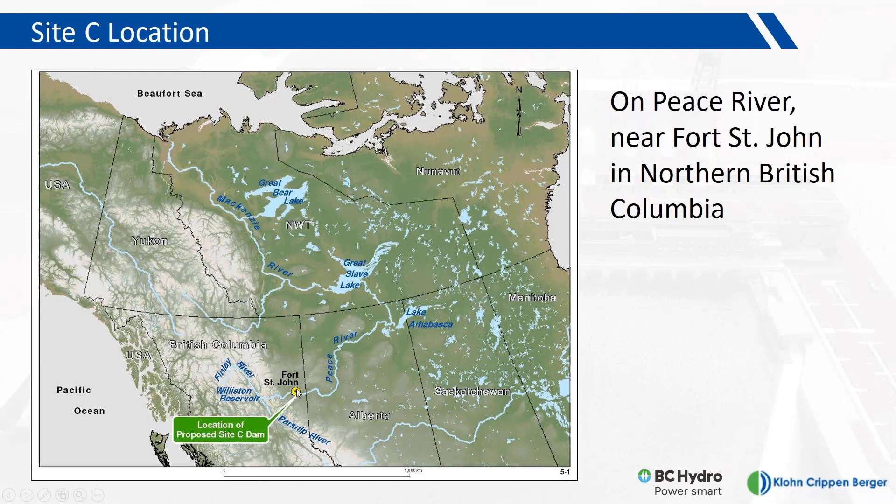Site C, when completed, will be the third dam on the Peace River, downstream from the two existing facilities, which are the WAC Bennett and the Peace Canyon Dam. Site C will be approximately 83 kilometers downstream of the Peace Canyon Dam on the Peace River.

Because of this, Site C is able to take advantage of the storage in the Williston Reservoir to generate a fairly large amount of electricity with a relatively small reservoir footprint. You can see from this map here, the large Williston Reservoir, which is impounded by the WAC Bennett Dam, the smaller Dinosaur Reservoir, impounded by the Peace Canyon Dam, and the proposed Site C Reservoir with the dam near the town of Fort St. John.

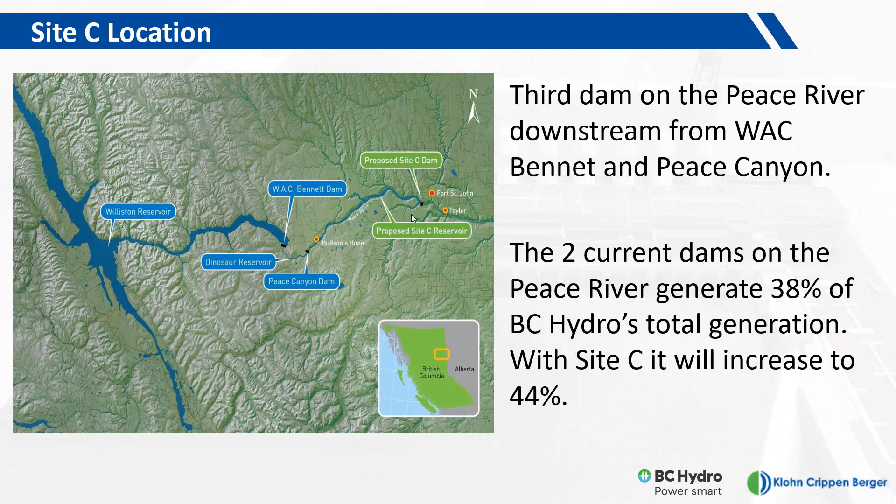The Site C project was first contemplated in the 1980s, and the dam axis identified at that time is actually very close to the present location. Here's a piece of trivia: where does the name Site C come from? During early investigations into the project, a number of different dam axes were identified as possibilities, ranging from Site A, the most upstream dam closest to Peace Canyon, all the way to Site F, the most downstream location. Site C, one of the ones in the middle, was identified as the preferred location for a number of reasons, and that's how we still use the name Site C today.

Here are a few key facts about the Site C facility, shown in this architectural rendering. Site C will be an earth-fill dam with a crest length just over 1 kilometer and a height of about 60 meters from the riverbed to the dam crest. The generating station capacity will be about 1,100 megawatts, with energy production of about 5,100 gigawatt hours per year. The reservoir length upstream is about 83 kilometers, to the toe of the Peace Canyon Dam, and the river width will be about 2 to 3 times the current river on average.

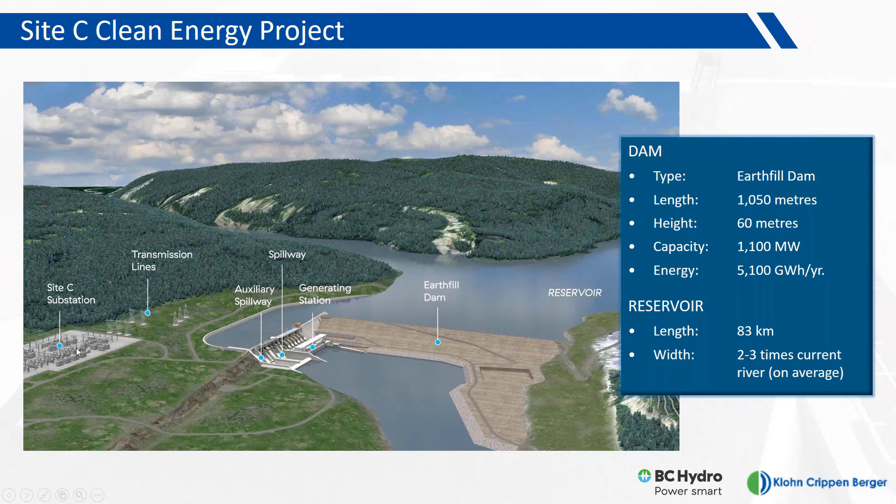Here's another rendering showing key components of the dam site. Today's presentation will focus on the north bank of the river, on the right side of your screen, where the Site C diversion tunnels are located. You can see the diversion tunnel inlet and outlet labeled here. The tunnels are in the left bank, on the right side of your screen, and form a U shape around the earth-fill dam. You can also see the reservoir and a representation of a debris boom upstream of the dam.

You can see the approach channel on the left side of the screen, which conveys water from the reservoir to the power intakes and the spillway. Also shown is the outline of the RCC foundation - RCC standing for roller compacted concrete - which will be built underneath key dam structures, including the spillway, power intakes, and powerhouse.

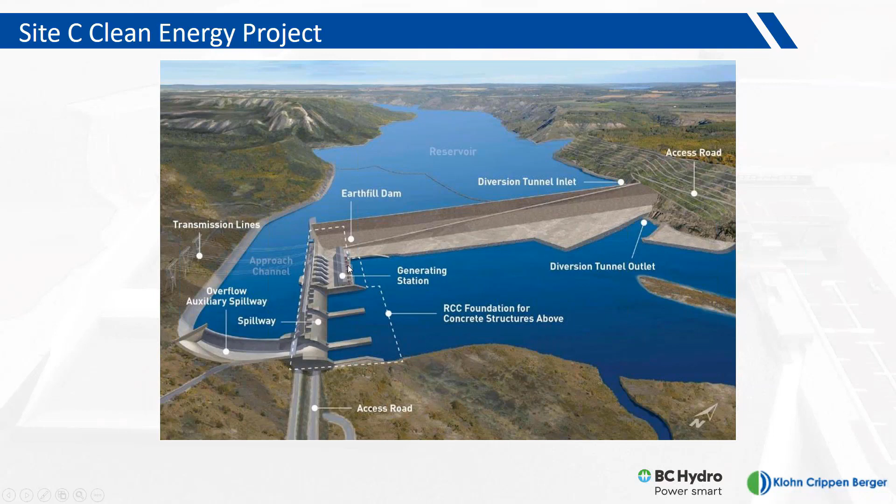Here's a schematic view of the diversion tunnels on the north bank at the Site C dam site. You can see the inlet structures at the top of the screen. The tunnels go into the bank around the earth-fill dam and out the bottom of the screen at the outlet structures. Each of the two tunnels will be approximately 10.8 meters internal diameter and concrete lined. The length of each tunnel is about 800 meters, and these tunnels are designed to pass the entire Peace River flow for approximately 3 years during construction of the earth-fill dam. They're also designed to pass a fairly significant flood event during construction, which I'll talk more about on the next slide.

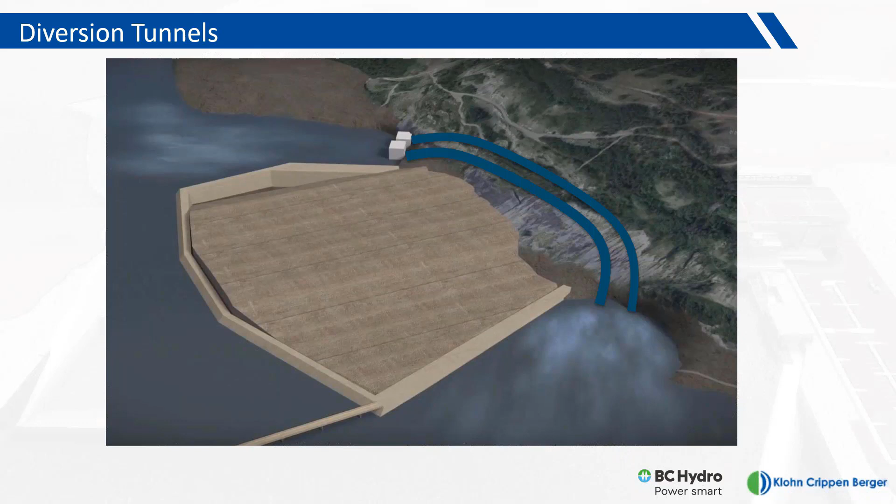The Site C diversion tunnels are designed for a total flow of up to 3,000 cubic meters per second. The Site C environmental impact statement establishes a minimum downstream flow during construction and permanent operations of 390 cubic meters per second. During reservoir filling, water levels are quite low and haven't yet reached the level to pass into the approach channel and feed the power intakes or spillway. So at the start of reservoir filling, we needed a way to pass the minimum 390 cubic meters per second downstream while allowing the reservoir to fill at the same time.

This was really the core design challenge, because the diversion tunnels are designed to pass a large amount of flow during construction, but in order to fill the reservoir while maintaining downstream flows, we needed to restrict the flow capacity through the tunnels. The obvious solution was to shut one of the two tunnels and perform reservoir filling with only one operating. But unfortunately, due to the large size of that tunnel - 10.8 meters internal diameter - the capacity is still too great to allow reservoir filling with normal flows from upstream.

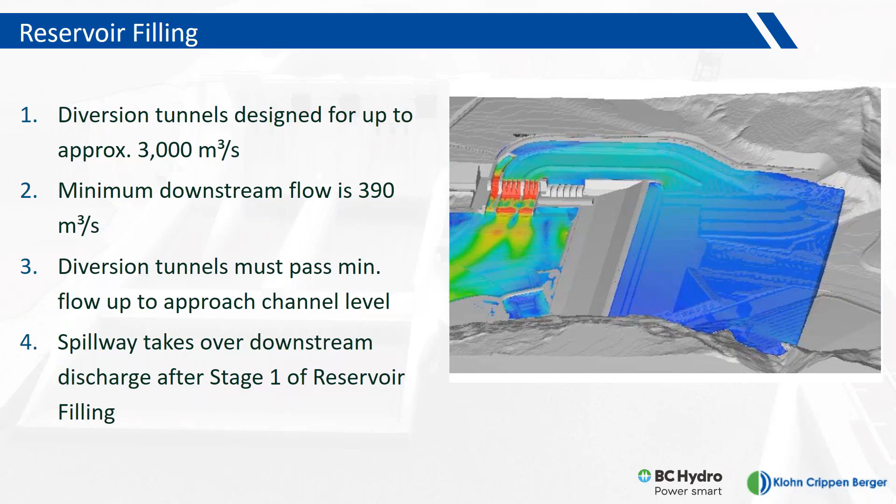So we had to investigate some alternative arrangements to pass those flows while filling the reservoir. This first stage of reservoir filling is done with the diversion tunnels passing flow downstream. But once we get up to the approach channel level, which is about half of the reservoir filling, then we are able to pass downstream flow through the spillway, so the diversion tunnels are closed and no longer used for passing flow downstream.

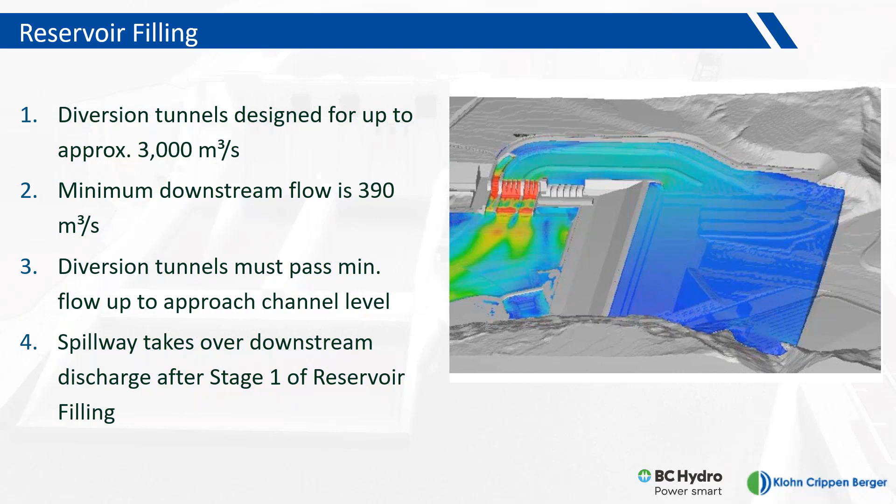But it was really this first stage of reservoir filling that is the topic of the presentation today. So before we started looking at different arrangements, we wanted to establish some key criteria for evaluating our design alternatives. We came up with a list of key criteria to use to evaluate our alternatives against. The first criteria is a translating hydraulic jump.

What I mean by this is we did not want to accept a final arrangement that would involve a hydraulic jump moving up or down the tunnel in different locations depending on the reservoir level. That would expose the tunnel to risk due to pressure fluctuations and the moving hydraulic jump, and it would also expose the outlet structure to potential risks from those pressure fluctuations. So we didn't want an arrangement with a moving hydraulic jump.

The second criteria was vibration of the upstream control gate. Each tunnel has an inlet gate designed to open and close. That inlet gate must open and close without issue at final closure and during initial diversion. So we didn't want to accept an arrangement where vibration of the control gate could potentially damage it or cause increased risk. That was our second criteria.

The third criteria was the impact on diversion. As I said before, the tunnels will operate for 3 years to pass the Peace River flows during diversion. We did not want to impose any additional losses or impacts on that diversion period or in the diversion tunnels, so that we increased risk of overtopping of the cofferdams during construction. We wanted an arrangement that would not impact the diversion tunnels during that 3-year construction period.

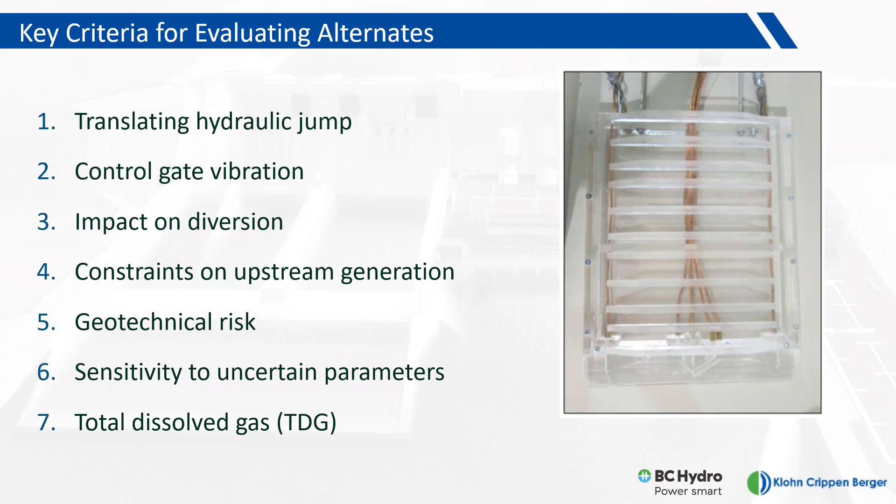This was one of the options raised during historic design of Site C in the 1980s. They were looking at partial closure of the upstream regulating gates, which effectively reduces the flow through the tunnel. But the reason we didn't like this arrangement was because it generated the translating hydraulic jump, or a moving hydraulic jump, which, as you recall from the previous slide, was something we did not like due to the risk to the tunnel and the tunnel liner. The second alternative we looked at was modifying the diversion tunnel diameters.

Both tunnels have an equal diameter of 10.8 meters. We did consider building one larger tunnel and one smaller tunnel, which would allow us to only use the smaller tunnel during reservoir filling. However, due to constraints in the rock for the larger tunnel diameter, we did not want to go much larger than the 10.8 meters already established. That did not allow us to consider largely different tunnel diameters for the two tunnels, so we didn't like that option either.

The third option we looked at was building an entirely third diversion tunnel just for reservoir filling. That would be a much smaller tunnel than the 10.8 meters, and it would achieve the required criteria. But as you can imagine, that would be a very expensive solution and not something we wanted to accept until we exhausted our other alternatives.

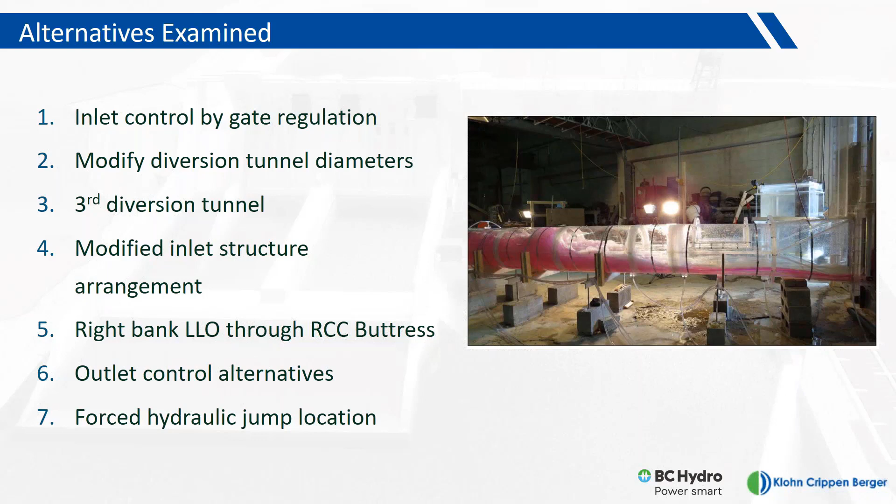The seventh option, which I'm going to show a little bit more in the next slide, was a forced hydraulic jump. We didn't like the first option, inlet control by gate regulation, because of the hydraulic jump moving up and down the tunnel. But we thought maybe we would be willing to accept this arrangement if we could keep the hydraulic jump in a known location near the upstream end of the tunnel. On the next slide, we did some further analysis on this option.

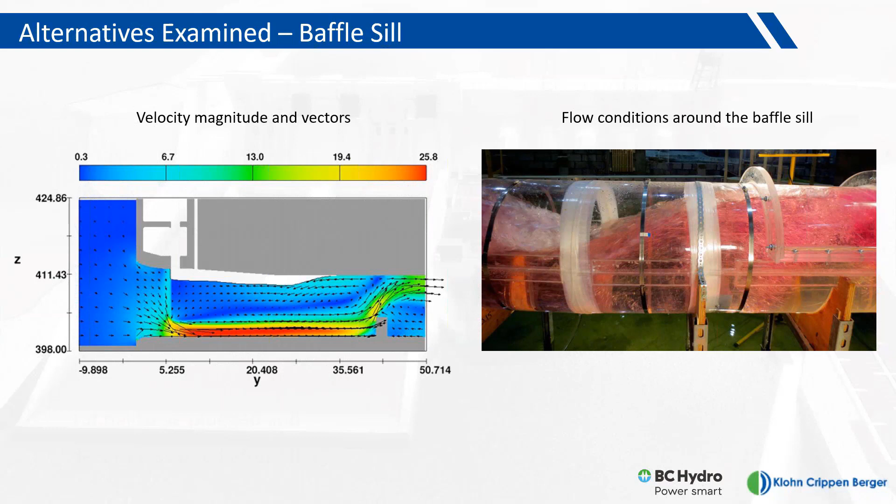This brings us to the selected reservoir filling design, which is described as a series of inline orifices, which will be installed in tunnel number 2, that's the outer and slightly longer of the two tunnels. The orifices will be installed in tunnel 2 after the 3-year diversion period, but just prior to reservoir filling. These orifices are effective at adding local losses into the tunnel and reducing the flow capacity of the tunnel significantly. The design of these orifices was modeled after a successful precedent project in China, the Xiaolangdi hydroelectric project.

In Xiaolangdi, they actually use these orifices in a permanent spillway tunnel. There's several of the spillway tunnels for long-term operation. So that's the biggest difference with Site C, is that we will be using these orifices for a fairly short-term period during reservoir filling, and then the diversion tunnel is plugged and decommissioned and not used again.

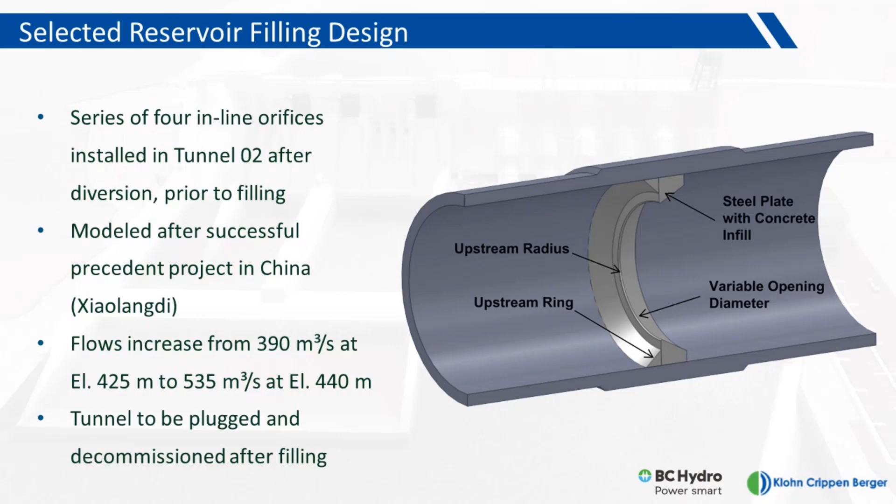These orifices were effective and have operated since 2010 in the Xiaolangdi project for permanent operations. So the flows through the diversion tunnel using these orifices start at about the minimum downstream flow of 390 cubic meters per second, at the start of reservoir filling with an upstream water level of 425 meters. That flow only increases to about 535 cubic meters per second at the maximum filling level of 440 meters, where we transition from the diversion tunnels to the spillway for downstream flows. So at elevation 440, the diversion tunnel will be closed. Now that flow increasing from 390 to 535 is done without any upstream regulation of the gate, with a fully open tunnel, just with the orifices restricting the flow capacity.

For the Site C arrangement, the steel plate will form the orifices and will be installed with embedded plates and welded to the embedded plates in the concrete liner. The orifice will also be infilled, the steel will be infilled with concrete.

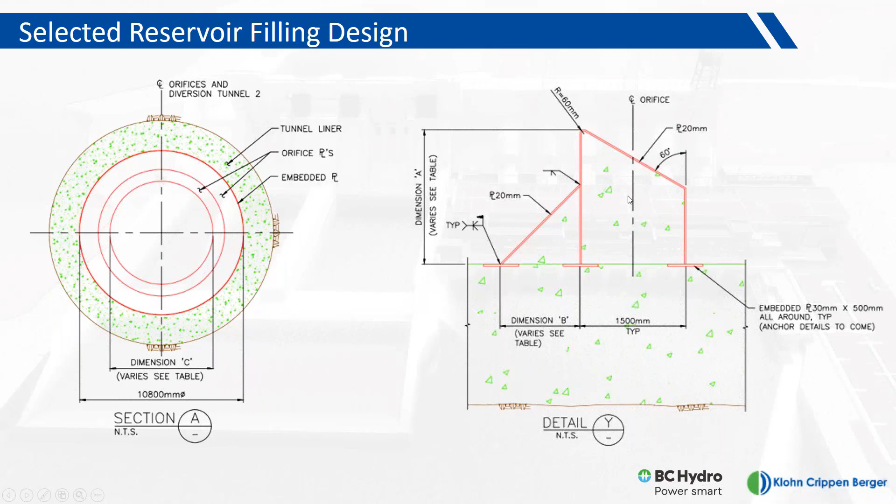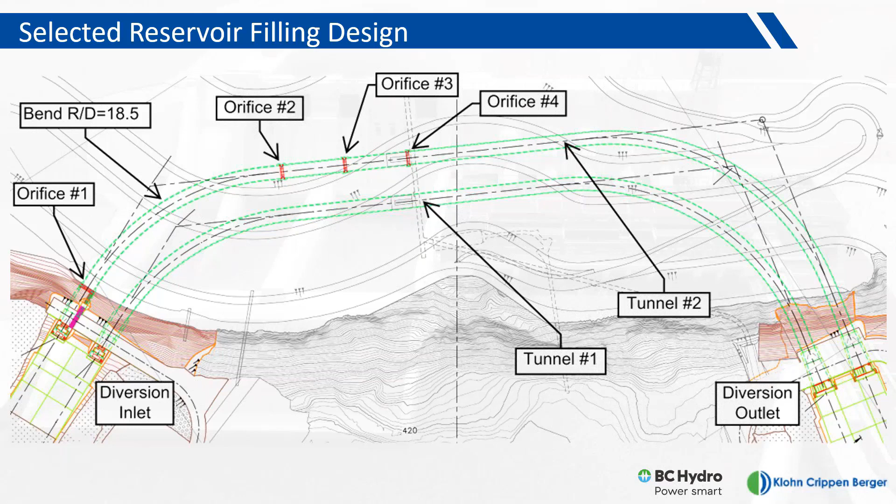Now here's an additional view showing a profile through tunnel number 2 with the 4 orifices. Two of the key criteria we used during design were the hydraulic losses, or hydraulic gradient in the tunnel, and the cavitation performance. The final diameters selected mean each orifice has a slightly different opening diameter in the center. The first orifice has the smallest opening at 0.68 times the diameter of the tunnel, and the openings get slightly larger as you move downstream.

This might seem a little counterintuitive, but the reason is that each of the orifices has a reduced downstream pressure, or back pressure, as you move downstream. So we actually wanted the most loss at the first orifice, where we have the highest downstream pressure. That was important for the cavitation performance.

You can see from this profile that the tunnel slope was actually modified due to the addition of the orifices. Tunnel number 1, which doesn't have any orifices installed, has a constant slope from the inlet structure to the outlet structure. But tunnel number 2, we modified so it had a slightly steeper initial slope of 5.2%, then a flatter slope from about orifice number 2 to the end of only about 0.2%. The reason for that modification was to increase the downstream pressure as much as we could on orifices 2, 3, and 4, which was also done to improve the cavitation performance.

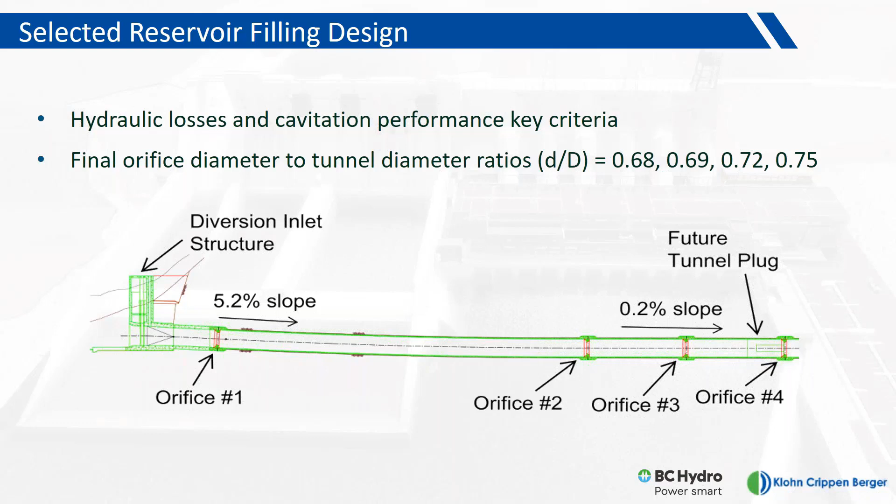Now I'll show a couple of slides with some of the design investigations, or design techniques, that we used to look at these orifices in detail. The first one we used was CFD modeling, or computational fluid dynamics. We used the Flow3D software to provide insights into the velocity patterns, pressure distributions, and discharge capacities of the tunnel.

One of the most interesting things we found from the CFD modeling and visualization was the interaction between orifices. You can see from the image at the bottom left, this was one of the early designs for the orifice arrangement. The first orifice is shown here, where velocities begin to increase, and the second orifice just downstream. Now you can see from this color plot that the contracted jet from the first orifice has not expanded back up to the full tunnel diameter by the time it reaches the second orifice. That meant the second orifice was not nearly as effective at reducing energy as the first, and that was something we didn't want to see.

Because of this visualization, we observed that we wanted to increase the spacing between the orifices, which was put into place for the final design. We also saw excellent agreement between the results of the CFD modeling and the physical hydraulic modeling, which I'll show on the next slide.

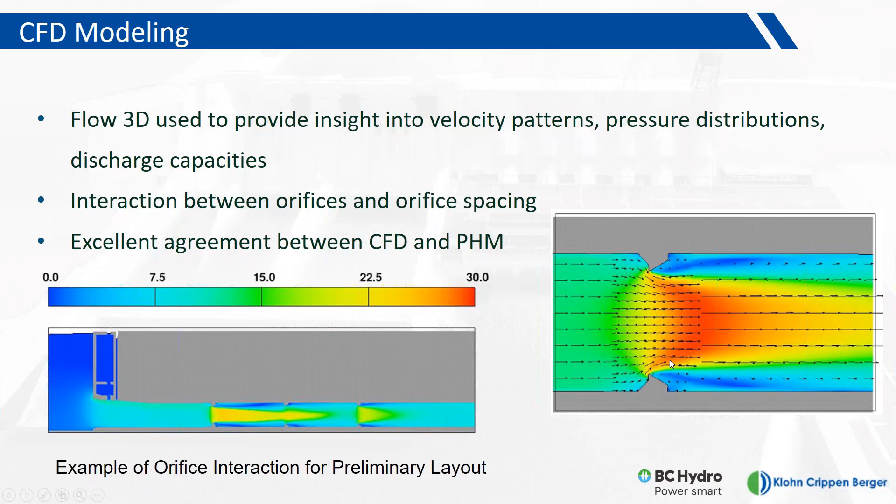We also constructed a physical hydraulic model. The model was done at the LaSalle NHC lab in Montreal, and 2 different size models were constructed. The first one was a 1:40 scale, representing a 10-inch pipe, and that was the primary model used to model the orifices and do all of the pressure investigations for the final orifice arrangement.

A slightly larger 1:20 scale model was also constructed, about a 20-inch pipe representing the diversion tunnel. That option was primarily used to test some of the free surface alternatives, such as the baffle sill and the translating hydraulic jump. We needed that larger scale for the free surface problems, whereas the smaller 1:40 scale model was effective at looking at the orifice arrangement, which is a closed conduit pressure flow situation.

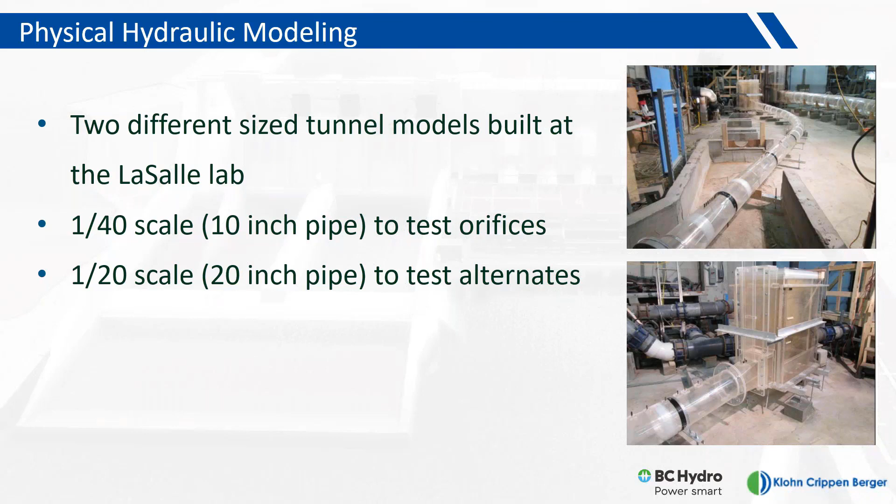Here is an output plot from one of the physical hydraulic models, showing the pressure profile of the final orifice arrangement in tunnel 2. The blue line shown on the screen is at the start of reservoir filling, representing a water level of about 425 at the upstream end of the tunnel. Each of the orifices imposes a loss, which drops the pressure profile at each orifice location.

The red line represents the final elevation for operation of the diversion tunnel with the orifices before the spillway takes over downstream flows. The red line has higher pressures and larger losses at each of the orifices. You can see that at orifice number 4, the red line dips just below the crown of the tunnel, representing slightly negative pressures in the tunnel just downstream of orifice number 4.

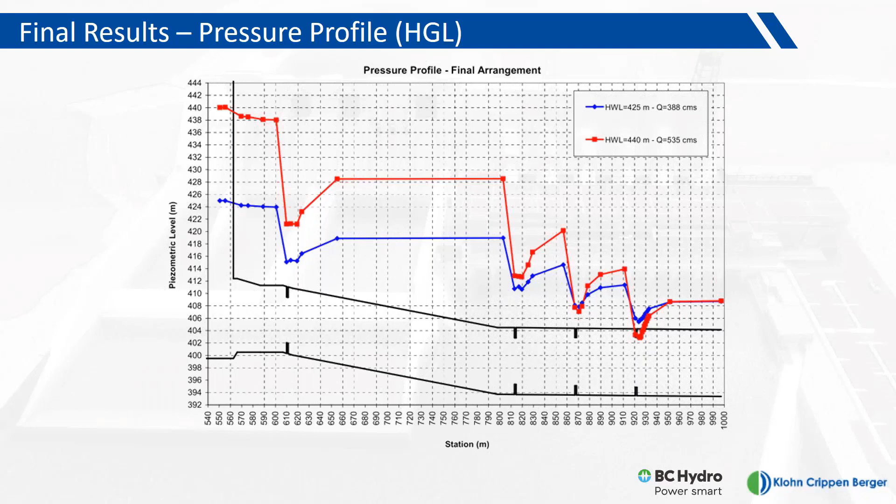We carefully considered and looked at that in detail in both the physical hydraulic model and the CFD model results, and determined that those negative pressures were in the center of the flow column. They were also just barely negative, not something to be overly concerned about. But we looked at those in detail, and we were satisfied that our design was able to safely accommodate those pressures and would operate effectively.

This plot shows a rating curve to compare the diversion tunnel in its three different operating conditions. The green line represents the normal diversion tunnel rating curve, applicable when both diversion tunnels are operating during the three-year period of earthfill dam construction. At an elevation of 420, the tunnels can pass a flow of about 2,000 cubic meters per second.

When one of those tunnels is closed, we move from the green line to the blue line, representing only one tunnel. In both cases there are no orifices in the tunnel yet, just a wide open tunnel. At the same elevation of 420 meters upstream water level, we can only pass a flow of about 1,100 cubic meters per second.

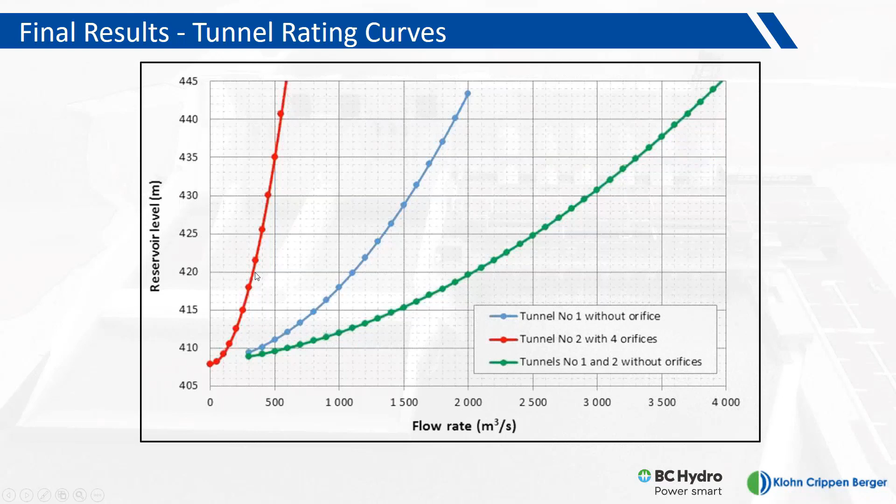When the orifices are installed in the diversion tunnels, that capacity restricts even further. At an elevation of 420, the flow through the diversion tunnel would be about 300 or 350 cubic meters per second. So this slide really just indicates how effective the orifices are at reducing the tunnel capacity.

Now I'll finish up by showing a few photos of some of the modeling that was done. This slide represents images from additional diversion gate testing done subsequent to the physical hydraulic model photos I showed previously. This model was done to look in detail at the diversion inlet gate and any vibrations or loads on that gate of interest. It was also done at the LaSalle NHC lab in Quebec, on a 1:20 scale model, or the 20-inch diameter pipe representing the tunnel.

You can see on the picture on the left, which shows the entire model, the wooden structure at the back is a head tank or head box, which contains the flow and represents the upstream reservoir. The gate would be located right here, and this curved section is the first bend in the tunnel.

The first orifice was modeled during this testing. It was located approximately where my mouse is showing here. The middle picture on the right is a representation of the gate. This model did quite an accurate representation of the gate - it was modeled out of aluminum, and the weight was scaled to the effective prototype weight, accurately scaled in this model.

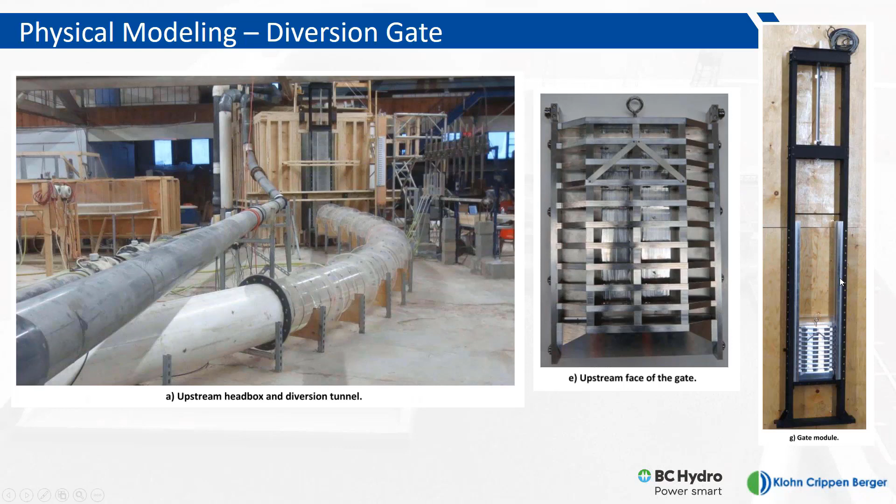Finally, I have a few pictures from the Xiaolangdi, the dam in China that used similar orifices. These pictures were taken from a book written on the Xiaolangdi project. The Xiaolangdi orifices were constructed slightly differently than the ones at Site C - they were constructed in advance before spillway operation.

So they are largely formed in concrete with just a steel plate on the lip of the orifice. You can see on the left picture these workers constructing the steel lip, but the rest of the orifice would be entirely in concrete, with the heavy reinforcing mat visible in the background.

The pictures in the middle show more detail of the top view of the opening in the center of the orifice. The bottom view is similar to the detailed view I showed earlier, with the upstream wedge and the radius on the upstream lip. You can see the scale with one of the workers in the background.

The two pictures on the right represent the tunnel - the top right shows the tunnel in the finished condition, with the opening through one of the orifices. On the bottom right, we see one of the tunnel formworks, which was put in to help with the concrete lining during tunnel construction.